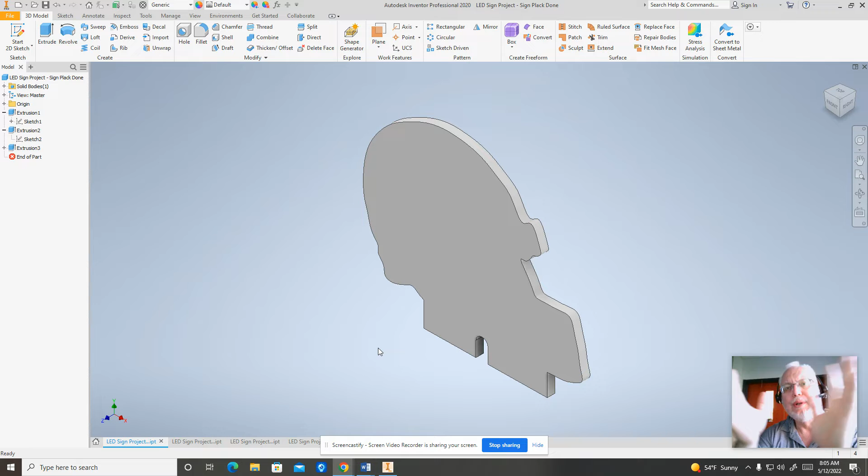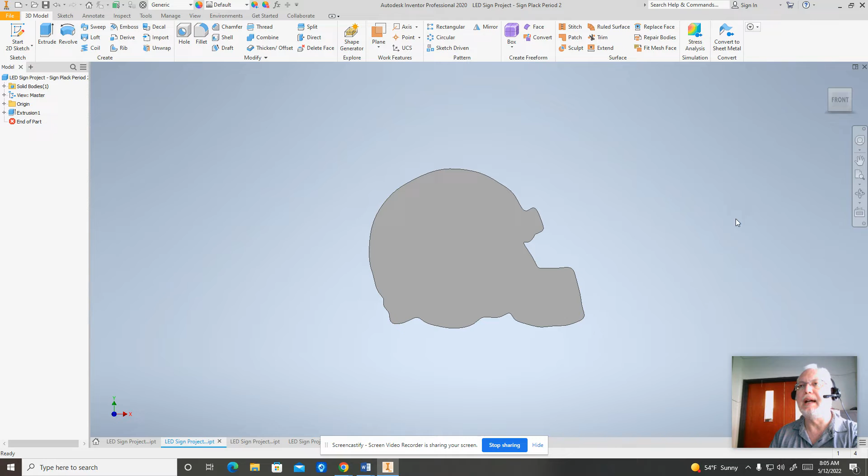But I'll show you how to put an image onto this thing. So this is our sign plaque now. We've created this in the first video. I'm going to show you how to put the little area down here onto this thing. So we're going to talk about this area here where the LED sits and how to do that. Okay. All right, so back to my little extruded sign plaque. I'll go back to home.

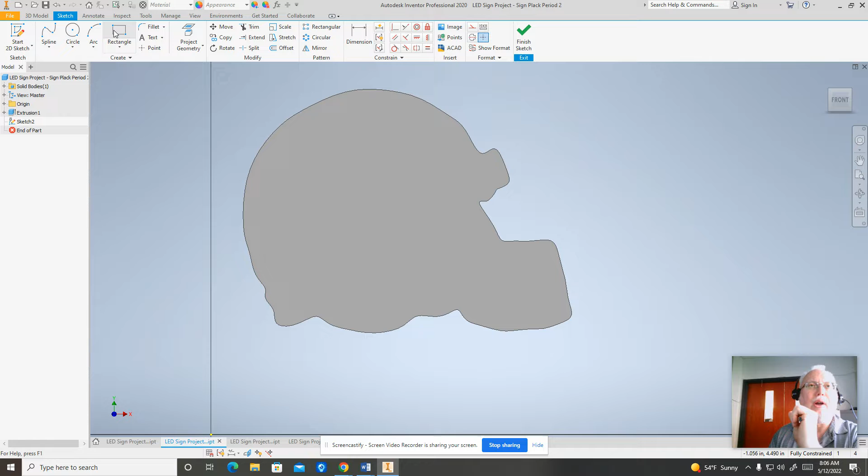Okay, now, in order to do this, I've got to create a sketch. So I'm going to start a 2D sketch, and I'll put it right on this surface here. We're just going to kind of eyeball a couple things here. So I'm going to draw a rectangle down here. There we go. And I'm going to actually do a couple dimensions on this. Now, I'm going to move this guy off to the side here. There we go. This is our LED.

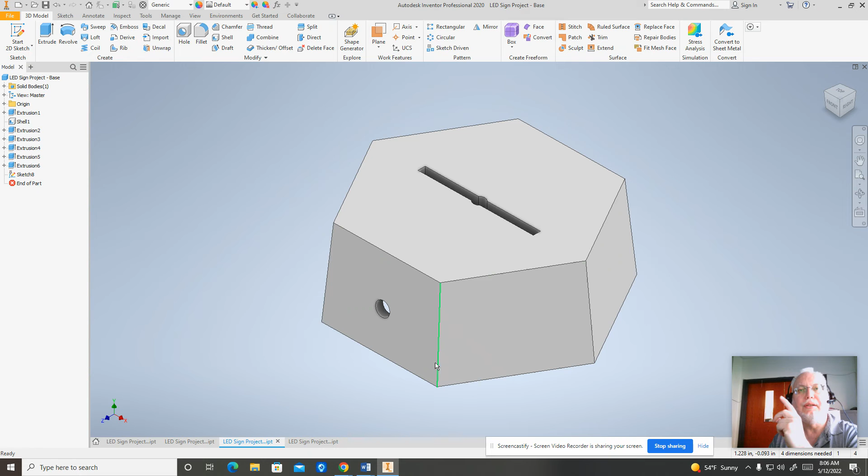This is our base. And what I want you to remember is yesterday on our base, and yours may be different, but on the base that I created with you, this slot length was 2 inches. So I need to know that because the distance from this corner right here to this guy over here has to be 2 inches, but minus a little bit. So I would make this distance from here to here 1.99, somewhere in that neighborhood. And that's just to make sure that we can fit this down into the base. So you want to make it 10 thousandths of an inch shorter than what the slot is that's in the base. All right, back to this.

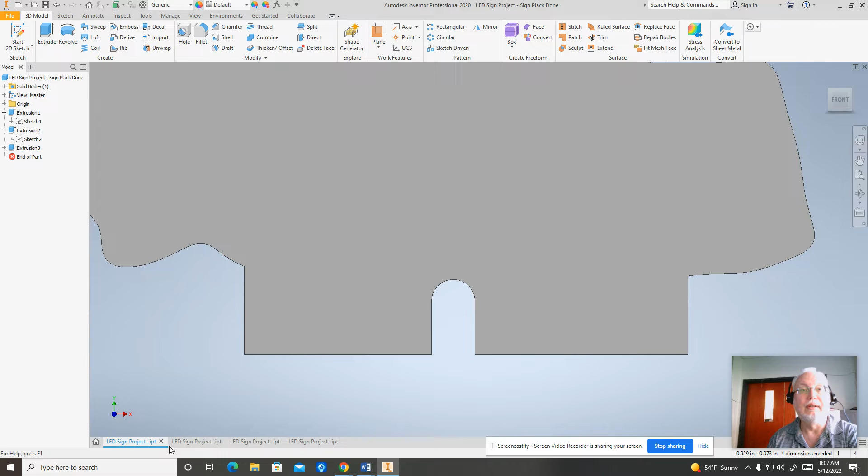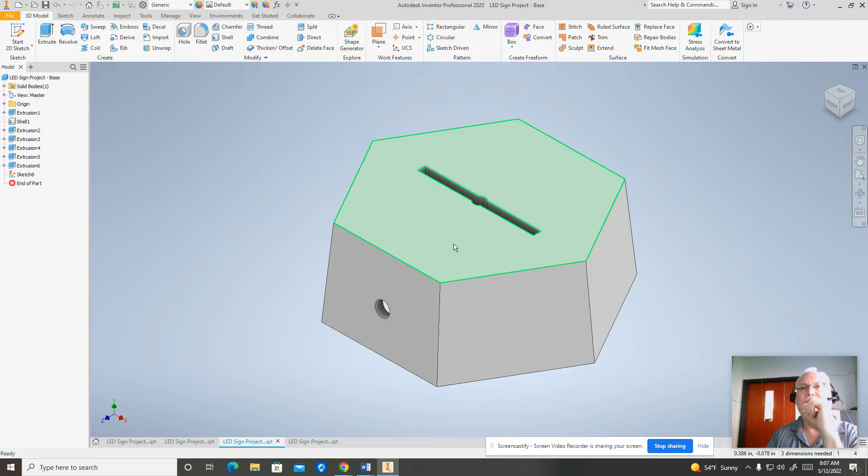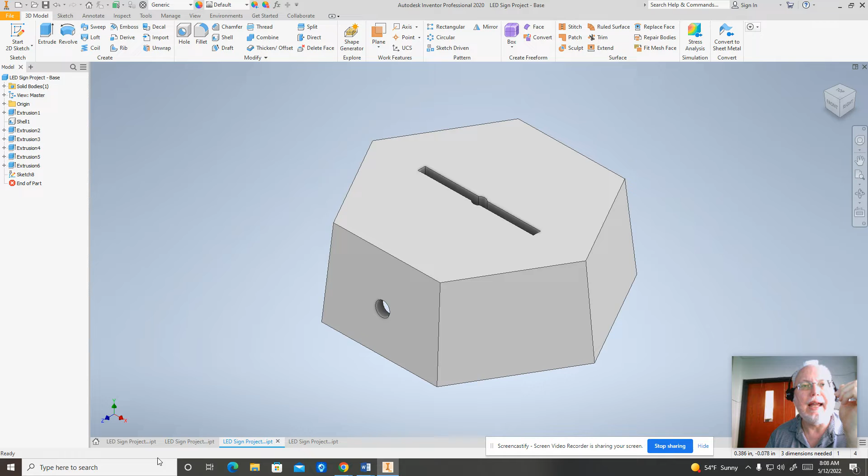So I'm going to dimension this guy right here, 1.990. Make sure I get that right. Good. And the other thing we want to know is the distance. Let's go back to our base here, from this top surface down to this surface on the little LED holder that we put into the base yesterday. And that distance, if you remember, is 0.33 inches. Okay. So I'm going to go back to that. Here we go. I'm going to put a dimension on here of 0.330 inches.

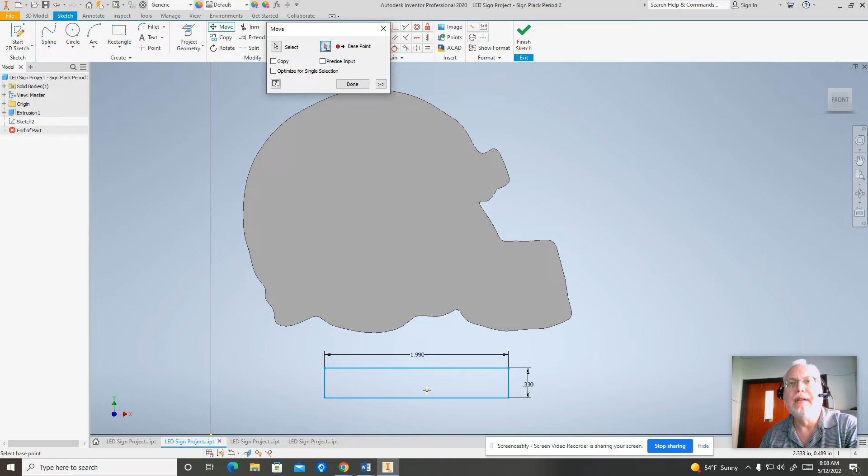So that's my little boss, I guess is the best way to put it, or tab. That's a good word for it. I'm going to move this now. So I'm going to use the move tool, and I am going to select all of this good stuff. And then I'm going to click on the base point arrow here. And then I'm just going to put this in the middle of this rectangle that I just created.

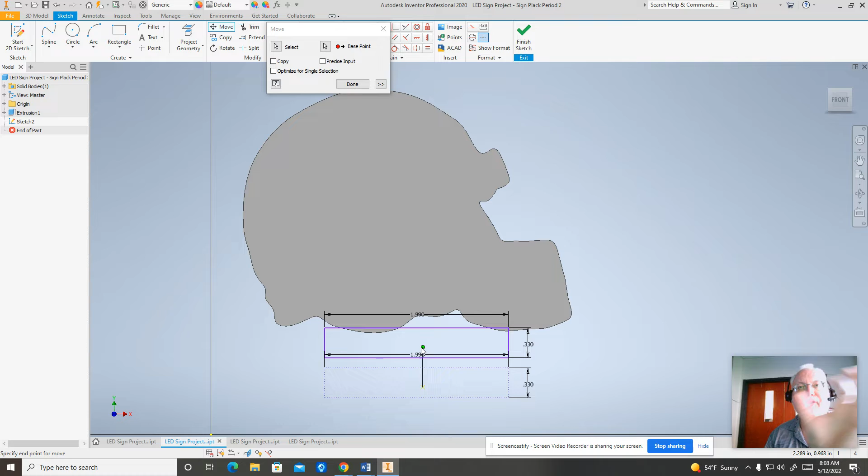I'm going to move this until, and by the way, don't forget, you want to have this rectangle go over the edge of this thing for sure. I'm just going to kind of get it evenly on here, back and forth. I'm just looking at it. I'm not too worried about it. So I'm just going to put it on here. Oops, I've got to click. There we go. And now I'll say done. Now I can finish this sketch,

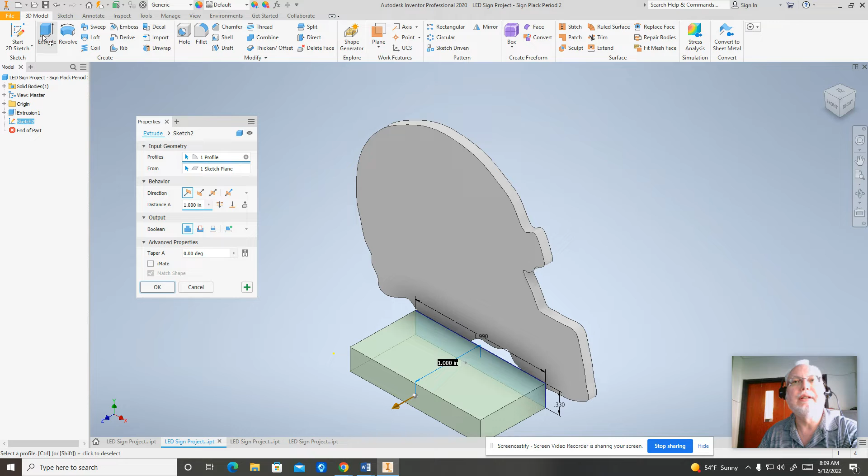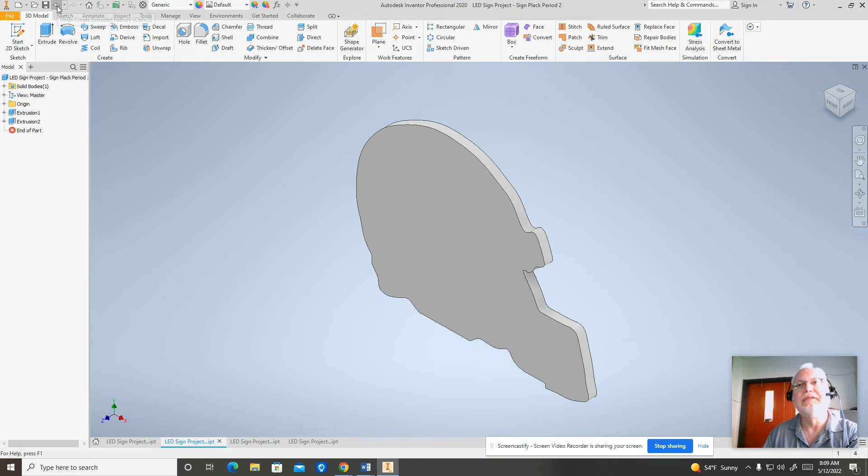and I am going to do an extrude. Okay. It's going to flip and go in the opposite direction. The distance is going to be the same as the thickness of the plaque here. So that's 0.125 inches. And I'm going to say okay. And it didn't work. Why didn't it work? Well, we'll try it again. Extrude.

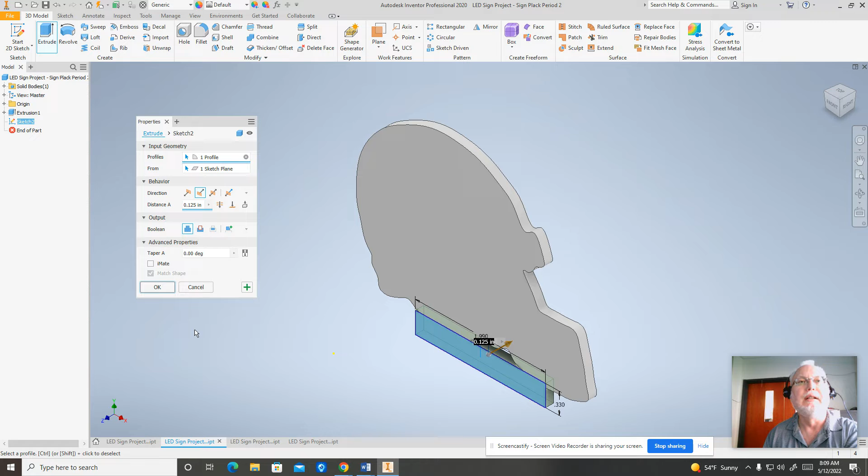Oh, maybe I know what happened. I think I hit cut accidentally instead of extrude. Yeah, there we go. I forgot. I have to go here next to Boolean. I have to hit join rather than cut. So with any luck, it worked, and it did. So let's look at this from the front. Okay, so I'm not worried about this little hole here. That just kind of gives it some character, right?

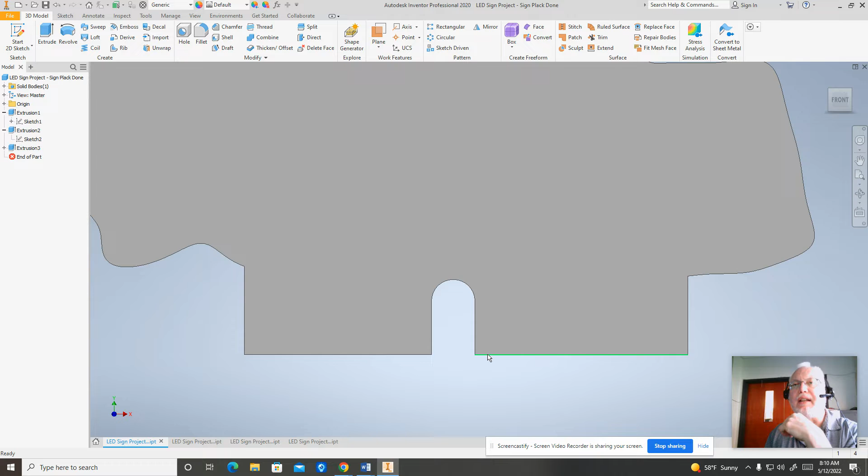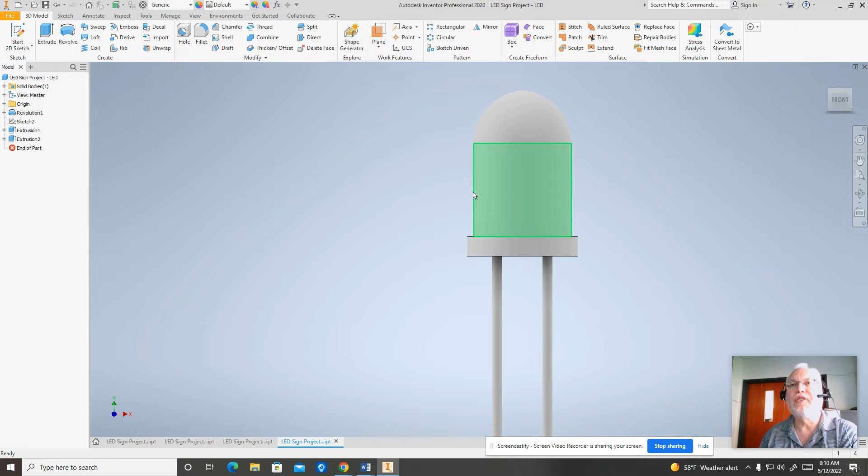I guess. Now, the next thing I've got to do is in the middle of this, I want to put my LED. There's got to be a slot in this thing for the LED to fit. And the distance from the bottom to the top up here is going to be 0.33 inches. The distance from here to here, well, that's the width of our LED, or the diameter of our LED. And the diameter of the LED, if I look at it from the front here, from the left-hand edge to the right-hand edge is 0.195. So we'll make it just a tad bigger than that, but not a lot.

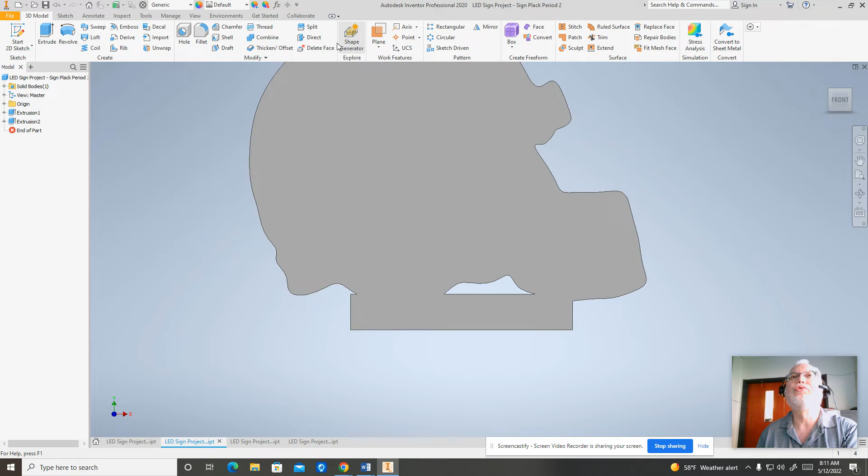All right, back to my project. There we go. Okay, so I'm going to start by drawing a sketch. And I'll look at this from the home view. Right? I'm going to click on that face so that my sketch goes right on this face.

And I'm going to start with a line. I'm going to use the construction tool here. Now, the reason I'm using the construction tool is so that I can just kind of use it as a reference. And what I'm looking for here is, there it is, the little green dot that appears when you find the middle of a line. And I just drew that construction line straight up.

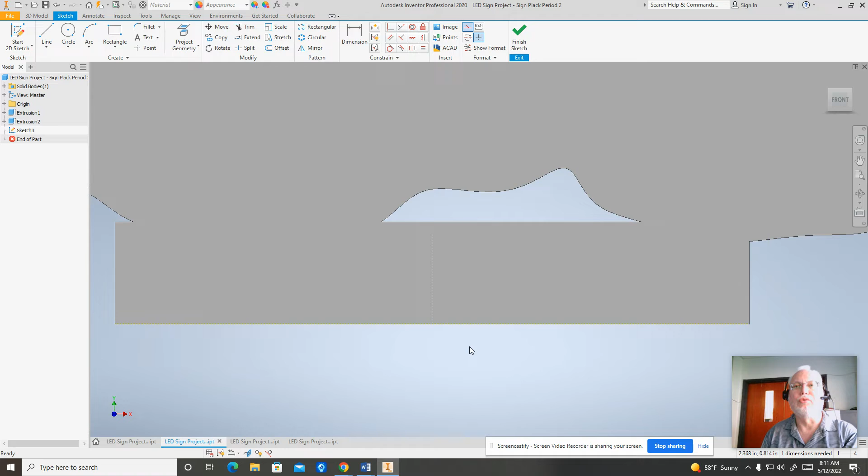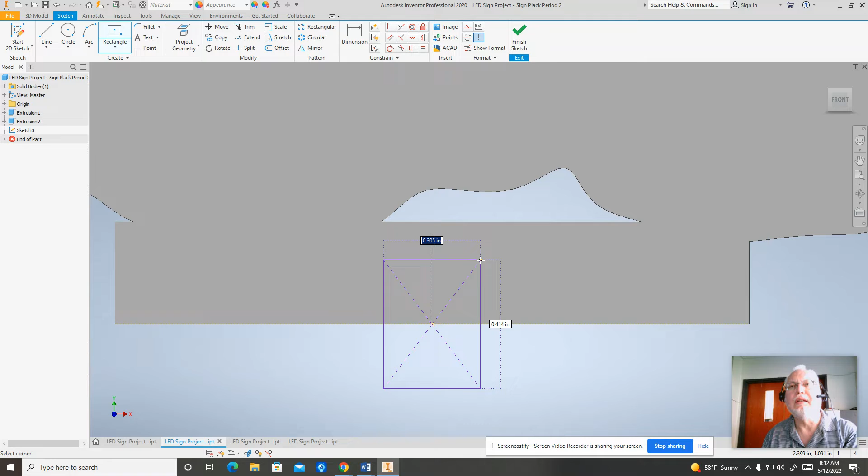Now I'm going to actually turn this off, and I can get my 2-point rectangle. Let me try this one. I'm going to try the 2-point center right here. Okay. All right. Well, oh, that's going to be nice, actually. So I'm going to make this width, the one that's lit right now, 0.2, because I want this to be a little bit bigger width-wise than the 0.195 of the diameter of the LED.

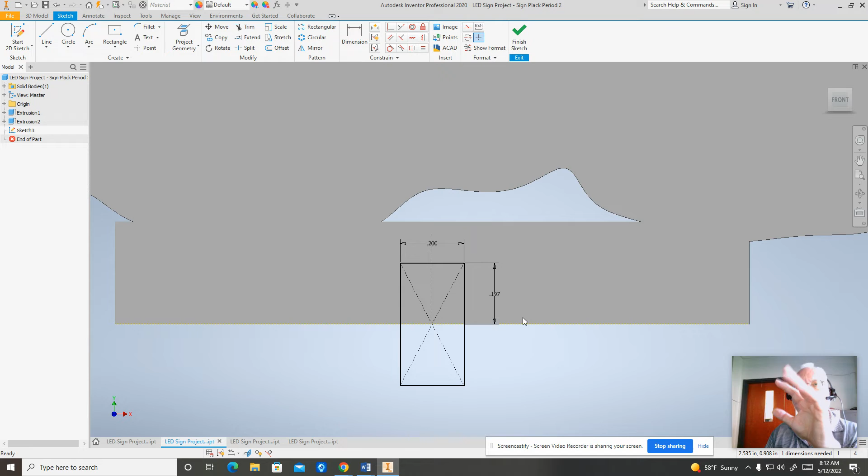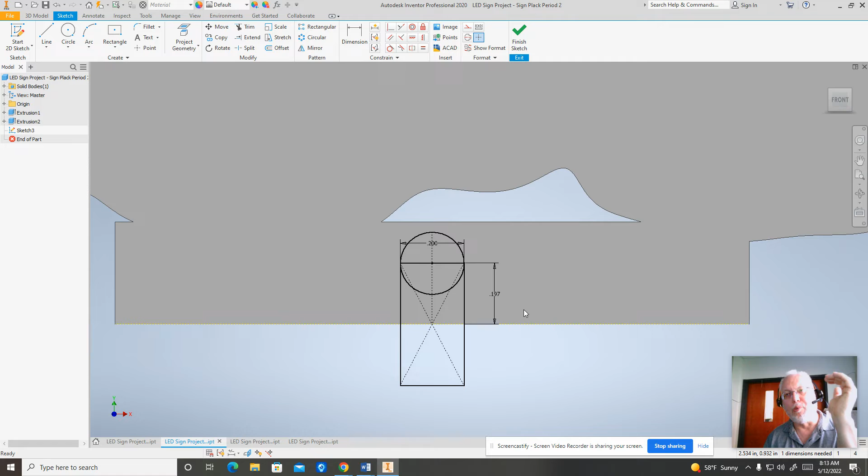The other thing I want to know is the dimension from that bottom line there to here. And this is going to, oh, you know what? I'll just leave that right there right now. That's fine. The other thing I have to do is I'm going to do a circle tool, circle center point. I'll click that, and I'm going to do this circle here. This is the center of the LED, or the dome of it. Okay, and dimension. Oh, actually, I don't need the dimension.

I just need to trim. So I'm going to trim, and I'll get an error message in here. I know that. Oh, you stupid thing! It's going to make me do all of these. Okay, and I got to get rid of this line in here too. Oops. Yeah. Okay, so I have a dimension on there that I can't delete until I delete that dimension. All right, now what I'm going to do is I'm going to put that dimension in that it just wanted. So I'm going to go from this construction line, and I'm going to go to the center of this thing again. I'm going to click.

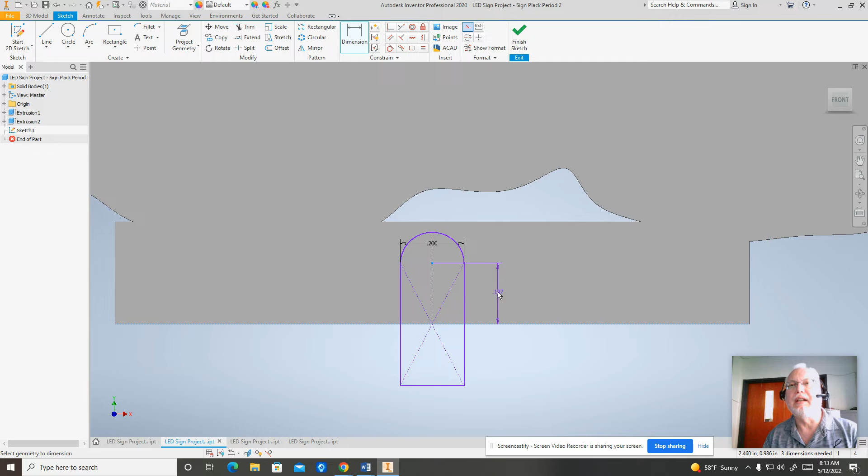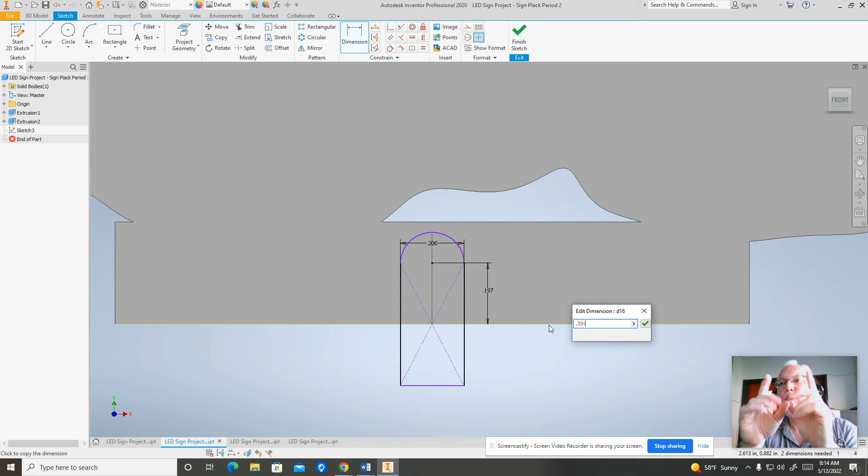Now, the height from here to the top of this should be 0.33. I've got to take that 0.33. Okay, so I'm going to put 0.33 in here. I'm going to put a minus sign in, and then I'm going to put in the radius of the dome on the LED, and that radius is 0.2 divided in half, which is 0.1. Okay. Right, I got that in there. Got a couple little troubles showed up.

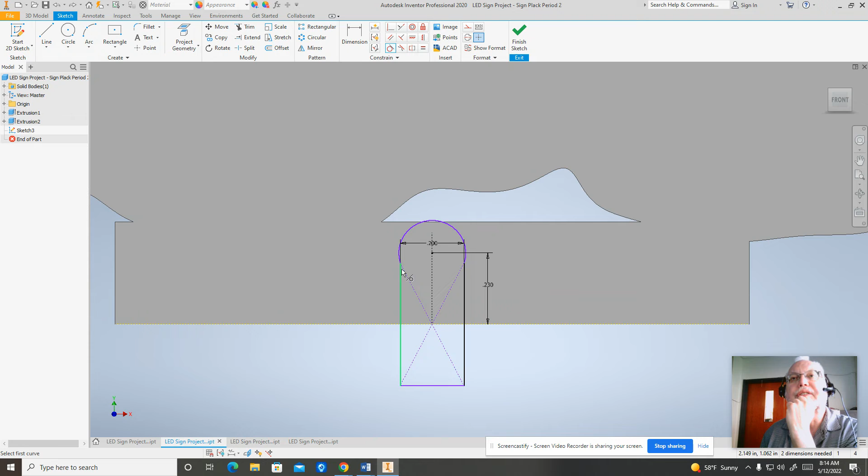I'm going to do a tangency between here and here and here and, oh gosh. Don't you just love it? The software sometimes wants to be a problem. Let's see if I can do it. I'll do this one to here. And you know what I got to do? I'm going to actually have to delete a dimension here before I can do this. I'm going to make sure I get this all situated. Now I can put that dimension back on. It shouldn't be a problem. I shouldn't really need it, but I'll just put it on there for giggles. So it's 0.205. Okay, green check mark.

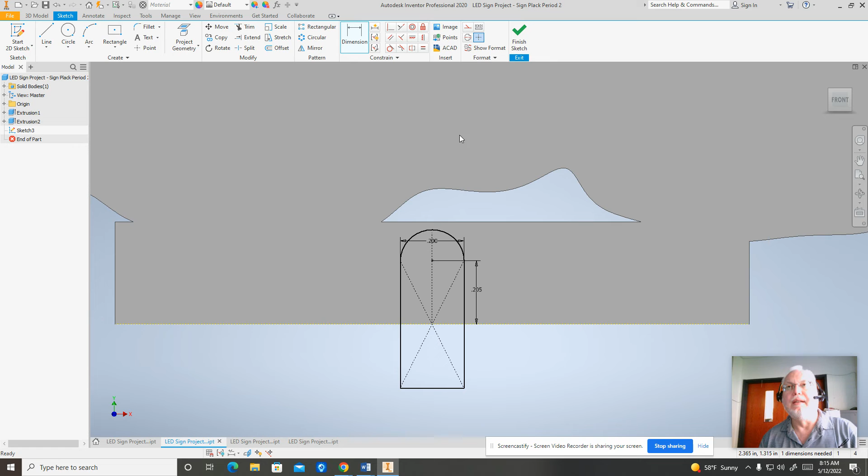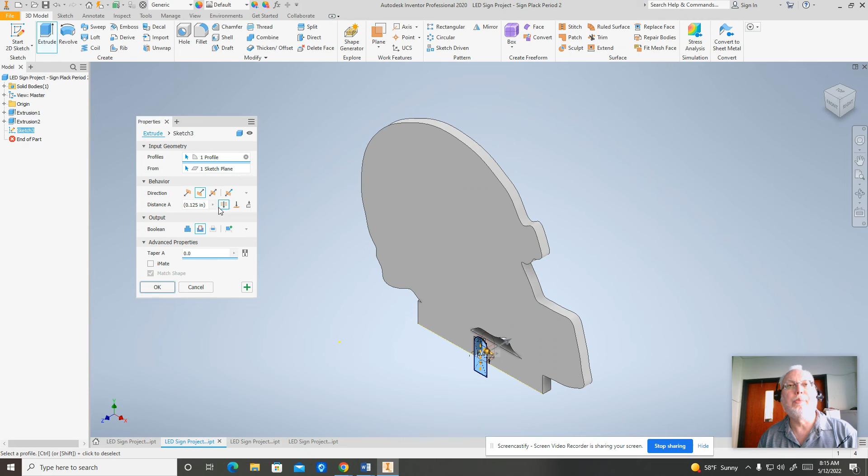All right, now almost the last thing here, I think, if I remember right. So now I am going to extrude that. It's going to go the opposite direction, and the Boolean output is going to be a cut. So if you don't have cut, set that up. Also press through all, and then I'm going to say OK. That is then going to give me the holder for the LED that's going into this thing.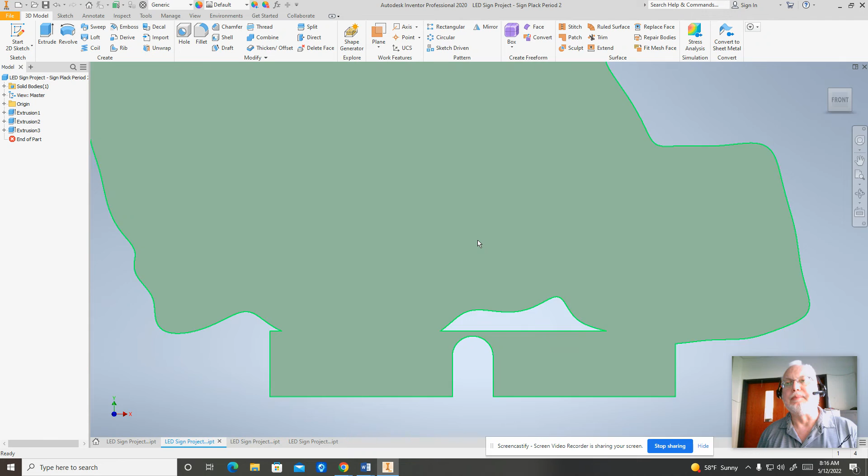Now, something to do here is you have to save this. So I'm going to go File. I'm going to do Save or Save As, whichever one happens to work. I'll hit a Save As. So I'm going to go File, Save As. This is going to be my last name. So you'll put in your last name. All right. SEWERT. And then the material color that I'm going to want this to be. For instance, I want mine to be clear.

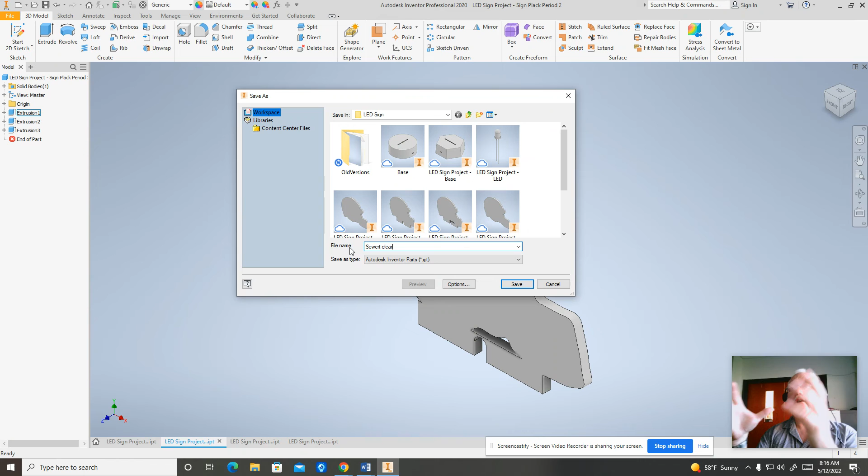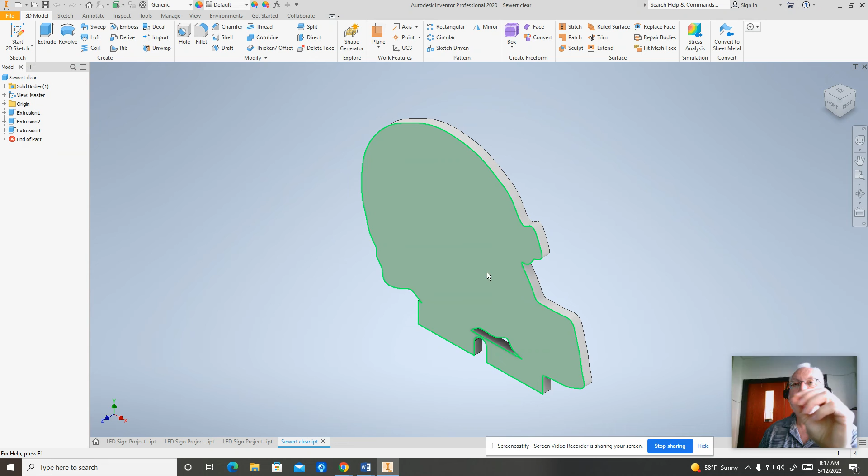I'll list off the materials and the colors that are available to you. I think there's red, yellow, I think there's green, clear. But anyways, let's say I want this to be clear. Okay. If you don't put a color into this thing, I won't know which color you want run on the laser. If you're not there, I'm going to just pick one, and that's just going to be what you have to go with. All right. Let's see, Sewert clear. And I'll say save.

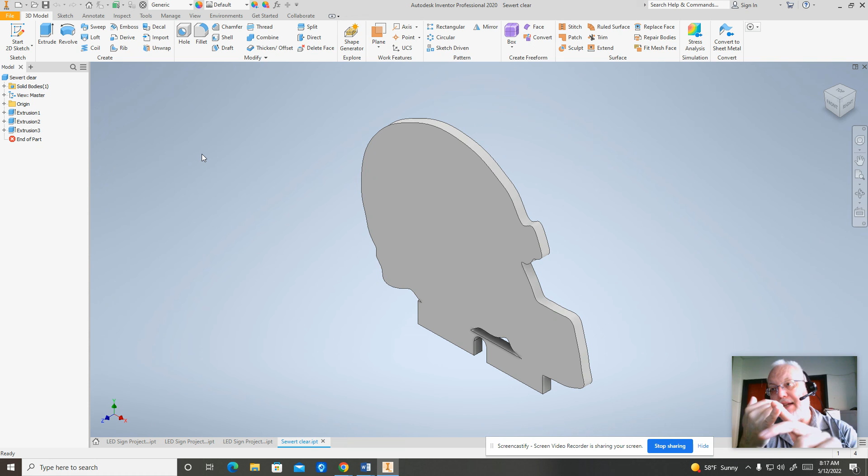Now, you're going to put this IPT file. Excuse me. We have to make this a PDF. My apologies. So you'll do just like we did with the Monster Guy, where you put this onto a vector cutting sheet. It's only going to be a small thing. So just one part goes onto the vector cutting sheet, and you upload the vector cutting sheet to the Google Classroom. And you also need to load up the image that you're using.

So in my case, I have to go to my folder. Let's see if I got it here. No, I don't. So I got to go to my folder and find that image, my Buffalo Bills helmet image. Where are you? Yeah, here it is. And I have to attach that to the Google Classroom. So you need for this to attach really 3 files. All of them have to have your name in them.

The picture that I use, you have to put the plaque design on there that you want onto the item. And you also have to put the LED base onto the Google Classroom. So 3 files are required, okay? The LED base, again, put your name, put the color that you want it to be. We're going to choose 3 colors. Black will be one. I don't know. Haven't figured that out yet.

So that's the end of this video. Thank you.